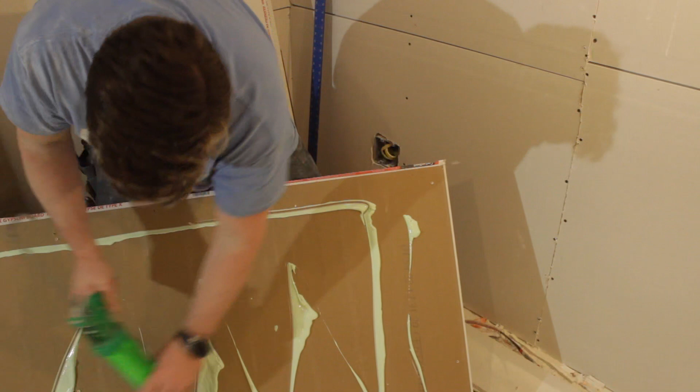When I first started doing research for my studio project, it was on like every video I looked at. Everybody said you have to put the green glue between 2 sheets of drywall if you want to soundproof something. But as I did research, I started kind of doubting the claims, like how is squirting this snot in between drywall really going to make that big of a difference? And so I started doing some research and couldn't find a whole lot of criticism and started maybe thinking the hype was legit. And then I decided that I was going to do my own test.

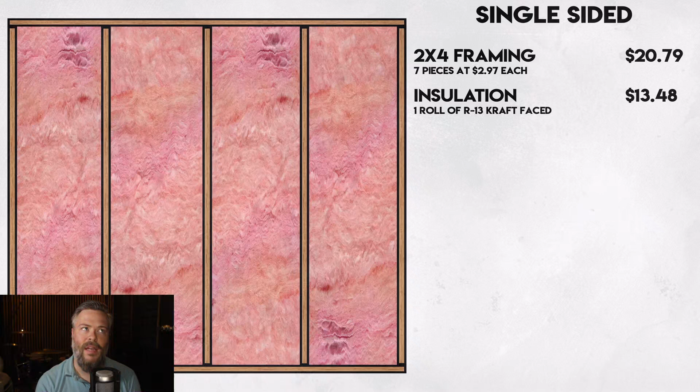The next thing we need to do is insulate it, and I decided not to do the Safe and Sound because I don't think Safe and Sound is worth the extra cost. But if you were to use a single roll of R13 kraft-faced insulation, that would cost you about $13.48 for this wall. You'd actually have a little bit left over, but that gives us a general idea.

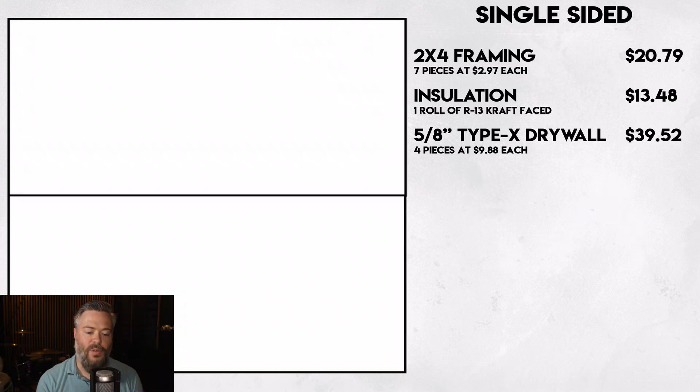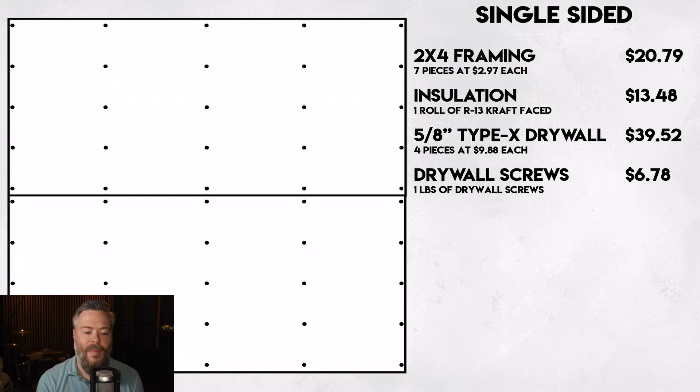The next step is the drywall, and of course I did the 5/8 inch Type X drywall because that's pretty standard for soundproofing builds. And we would need 4 sheets of it for the single-sided because it's 2 layers of 4x8 sheets on our 8x8 wall. Each of those would be $9.88 each, which would take us to a total drywall cost of $39.52. Then we need to get ourselves some drywall screws, and I decided just to put down a pound of drywall screws. That's probably overkill for an 8x8 wall, but I think it pretty much gives us an idea. So 1 pound of drywall screws would be about $6.78.

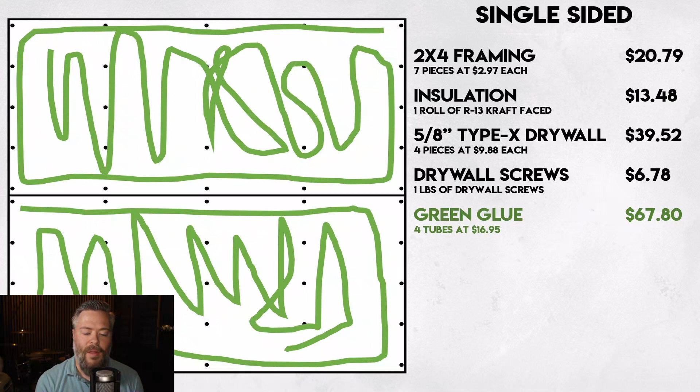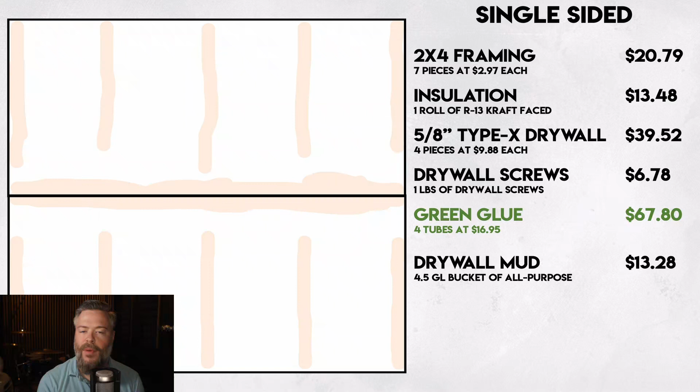Then that brings us to the green glue, which we would need 4 tubes to put double-sided drywall on one side of the frame. And those are $16.95 each, so multiply that by 4, and you get $67.80. Then we need, of course, drywall mud, and I decided just to put a 4.5-gallon bucket of all-purpose mud in there. I figure that gives us a decent number for calculating, which is $13.28.

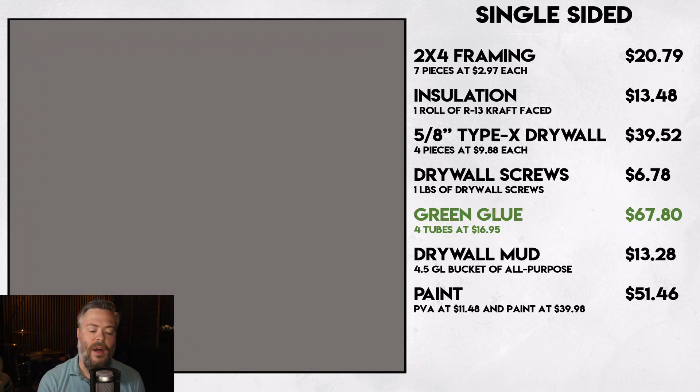And then we get to the paint, which I calculated for a bucket of PVA primer, a gallon of it at $11.48, and then regular paint and primer in one, I put in for $39.98 for a gallon, which brings us to a cost for paint at $51.46. Now, I know that doesn't include everything, but I think those are pretty much the basic components and gives us a good idea of what we would need to build a wall.

So that takes the total cost of our wall to $213.11. And because the green glue costs $67.80 of that, that means that the green glue accounts for 32% of the total cost of the wall. That is a pretty large percentage of something to be on your wall. And so I would say then it had better do a good job if it's going to be worth it, because it takes up so much.

But actually it costs an even bigger percentage if you put drywall on both sides of the framing. If you do that, the whole cost for the wall actually goes up to $320.43, which is a 42% chunk of your cost. So really, if your green glue, okay, just the stuff that you spray between sheets of drywall, is going to eat up anywhere from a third to almost half of your cost, it had better perform pretty darn well.

So how well does green glue perform? In order to answer that question, I decided to look on the internet and see what Green Glue said that they could do. And then I looked at their competitors to see what they said Green Glue could do. And then I looked at my own data. According to Green Glue's website, using our exact same configuration with double 5/8" drywall, 2x4 framing, 24 on center, R13 insulation, and Green Glue, you can expect an STC rating of 52, which means roughly 52 decibels worth of reduction.

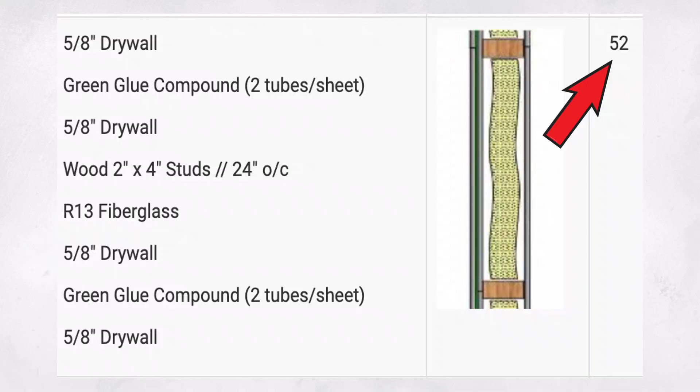So I went on Green Glue's competitor's site, Quiet Glue, to find out what they said about Green Glue when they did a comparison. And as it turns out, they did a comparison to something that Green Glue was able to get a 55 STC rating on, and Quiet Glue was almost able to match that with a 53 using Green Glue. And that tells me that basically you're splitting hairs at that point for 2 points, and that Green Glue is basically telling the truth. If they say they can get 55 and their competitor, who doesn't want them to do well, says they can get 53 using their product, then they're probably at least pretty close to telling the truth.

But I wanted to find out how much of this is being done by the green glue and how much of this is being done by the insulation, the drywall, and the other things in that model. And so I went on stcrating.com and I actually found a very similar configuration. The only thing that's different is they don't specify whether or not it's R13 insulation. It just says it's generic batt insulation, so it can be any R rating. But they say that you can expect to find between 43 and 45 on the STC scale for that configuration, and that doesn't have green glue on it. And so that means that Green Glue is essentially saying they can give you a 7 to 9 point STC rating increase by using their product. And I would say that that's pretty significant if it's true.

And so to answer the question, is green glue actually worth it? So far we know that it's going to increase your cost by 32 to 42%, but we also know that it seems pretty reliable that it's going to increase your performance by 7 to 9 points. So you'd have to answer the question yourself. Is green glue worth increasing your cost for that kind of a performance?

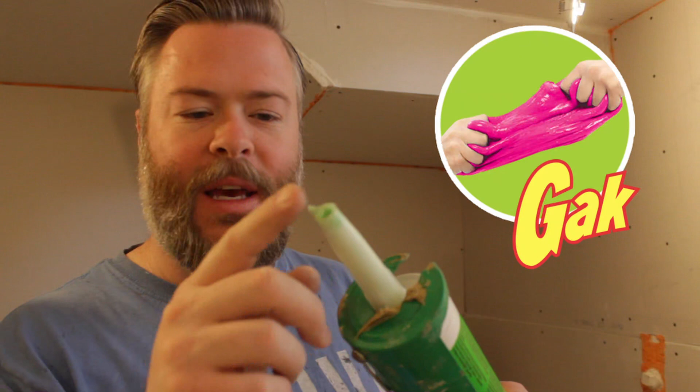But there's still the third question we need to ask, and that is, is there a viable alternative? And my answer to that question is absolutely there is, and it's called carpet glue. Basically, it comes down to the idea of cost and what they do. You can see here with the green glue tube, this has just been sitting around for a few days. And basically, this glue actually reminds me of Gak from when I was a kid, like Nickelodeon sold that Gak stuff. It's just like slime, Ninja Turtles ooze, all that stuff from the 90s if you're a 90s kid. So basically, even though this is dry, it's still very tacky and flexible, okay?

But this carpet glue, I opened it at the same time. You can see that this, even though it's a little bit stiffer, it's also still pretty gummy. I would say that this is more like if you were ever sitting at a restaurant and you accidentally touched a piece of gum that was stuck under the table, and it's like, oh, it's disgusting, right? It's a little dry, like it doesn't feel like it just came out of someone's mouth, but it's flexible and very stretchy. And this stuff is just a little bit thinner, but it's still kind of the same principle.

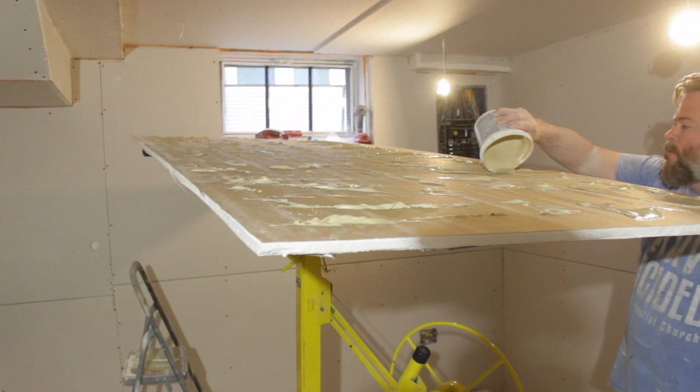So to me, if I have to spend $16 for one tube of this, and I need 2 tubes per sheet of drywall, or this was $6, and they have bigger buckets of this at Lowe's, and they have other brands and stuff like that at other stores, but this was the only one that they had, and it was $6 at Lowe's. And basically I'm using 75% of the container, and I'm just running it along, and it's way cheaper. So you're spending, I don't know, maybe $5 a sheet or $32 a sheet.

If you've had a chance to watch my material comparison video that I did, you would have seen that green glue and carpet glue were compared side by side along with a lot of other materials. And my findings at the end of that were that green glue didn't actually perform as well as the carpet glue. Now, if you watch the video, you may say, well, this wasn't a scientific setting in a laboratory. This was done in your garage.

And that's true. And you may also notice that at least I feel like the carpet glue had a better coverage than the green glue because I used an 1/8 inch by 1/8 inch notch trowel to spread it out on there evenly. And the green glue, I just squirted it out like the manufacturer says that you should. So you might say, well, that's going to be different. That's a little bit unfair.

But I will say this. The cost of carpet glue, you're looking less than $6 for a quart of this stuff, and you're spending almost $17 for a 28-ounce tube of green glue. The cost savings are significant. But how do they compare side by side?

Well, if you watched that materials video, you might have noticed that what I did was I took an average decibel reduction across the frequency spectrum, and I just gave an average number. So it was like, this one reduced by 38.4 decibels on average. Well, that's not the same thing as an STC rating. I found out that that's different, and I'll probably do a video about that in the not too distant future.

But what I did was I actually calculated the STC rating based on the tests in my garage to see what a difference green glue made and what a difference carpet glue made. Now, the STC numbers are going to be significantly lower than what we've been looking at because there was no insulation or anything like that. It was just strictly 2 1/2-inch sheets of drywall with green glue or carpet glue in between. But basically in that test, the green glue came back with an STC rating of 25, and the carpet glue actually came back with an STC rating of 43.